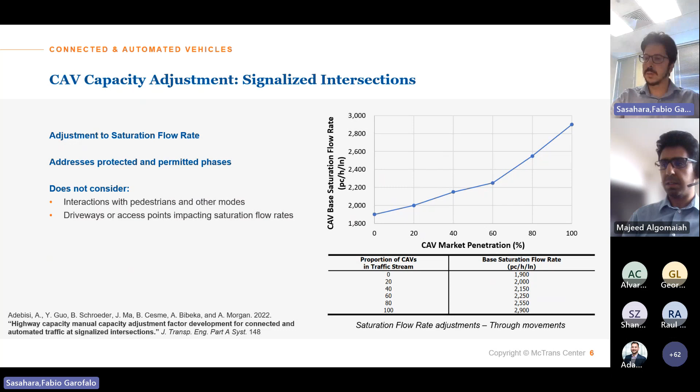Again, that's a planning level tool. It does not address everything. Interactions with pedestrians and other modes, and what's happening in driveways or access points, add a lot of complexity to the methods, not something that can also be addressed. So again, be aware of the limitations of the methods.

The last one on CAVs is roundabouts. The basic model of roundabouts analyzes capacity as a function of the circulating flow inside the roundabout. The effects of CAVs are plotted on graphs. There are 4 different capacity configurations depending on if you have 1 or 2 lanes entering or 1 or 2 lanes circulating inside.

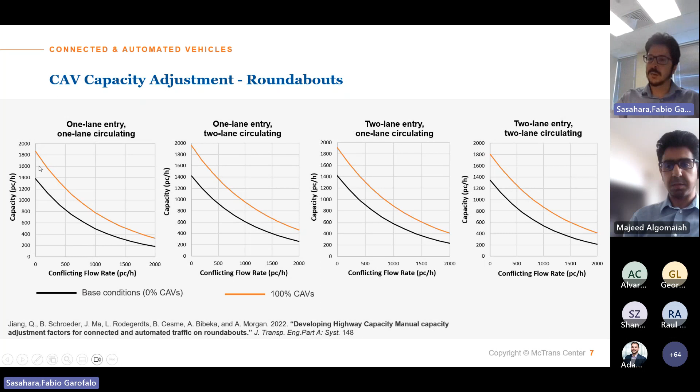The second method I want to discuss is two-lane highways, which completely replaces the methods we had before. We're going to compare a little bit what we had in the 6th and 7th editions. First of all, now we have the ability to do facility analysis as we currently do for freeways. We can model facilities with multiple segments that can be, as you can see here at the bottom, a passing zone when passing is allowed, a passing constraint when it's not allowed, and a passing lane when you add a second lane to the same direction of travel. We couldn't do that in the 6th edition.

Another new feature is that we can also break segments into sub-segments. Now this methodology is sensitive to horizontal alignment, so if you model horizontal curves, that gives you a better estimate of speeds.

In the second row in the column here, if you're familiar with the 6th edition, you may recognize this highway classification: class 1, 2, and 3. That depends on the class highway purpose. Class 1 is about intercity routes with longer distances and higher flows. Class 2 is more scenic routes, and class 3 is about rural locations with a mix of local and through traffic and a little bit of development. This classification was dropped in the 7th edition, so we don't have to worry about that anymore.

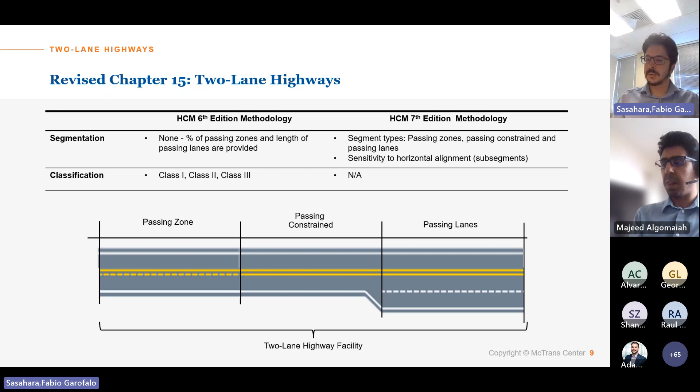Moving to the next slide and the table, we have some new performance measures. In the 6th edition, we had three measures: travel speed, percent time spent following, and percent of free flow speed. The last two were dropped.

We still have speed in the 7th edition, but now we have percent followers and follower density, two new measures. A follower is defined as any vehicle following the next one with a headway shorter than 2.5 seconds, which is the threshold where the HCM assumes a vehicle's speed is constrained by the next vehicle in a platoon.

No real change was made to capacity. Research didn't find any evidence that capacity should change, so it's still kept at 1700. The only addition in the 7th edition is that passing lanes now have a variable capacity, which depends on heavy vehicle percentages and grade.

At the bottom here, you can see a comparison of the level of service framework between the 6th and 7th editions. In the 6th edition, it depended on what class you were analyzing, so there were different service measures - travel speed, percent time spent following, percent of free flow speed, or a combination. Now we have a single service measure, follower density, that applies to every highway. Just be aware there are different criteria based on posted speed limit, more than 50 or less than 50 miles per hour.

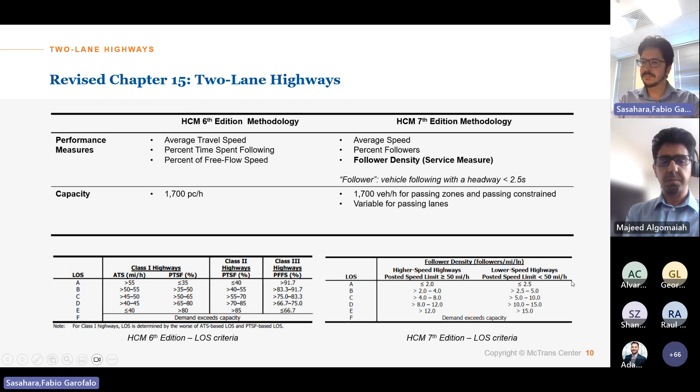The third method we'll be talking about here is some updates or upgrades to the pedestrian level of service. The main change here is on two-way stop control. All the other methods have just minor changes to the methodology.

Focusing on two-way stop control, we can again compare HCM6 and HCM7. In the previous release, level of service was based on pedestrian delay, measured in seconds per pedestrian. We had a small table addressing crosswalk treatments, which was expanded in the 7th edition - you can see a larger table here on the right side.

What has changed in the 7th edition? We have a new level of service measure called percent of dissatisfied pedestrians, which we'll see in a moment. The vehicular AADT is also now an input, so pedestrian level of service is sensitive to that as well. The list of crosswalk treatments is also expanded.

The idea of this table is that it lists a certain yield rate, or how compliant drivers are in yielding to pedestrians. In theory it should be 100%, but we know that's not what happens in the real world. So the HCM suggests average rates for different treatments like crosswalks, flashing beacons, HAWK signals, and others, as you can see in the table here.

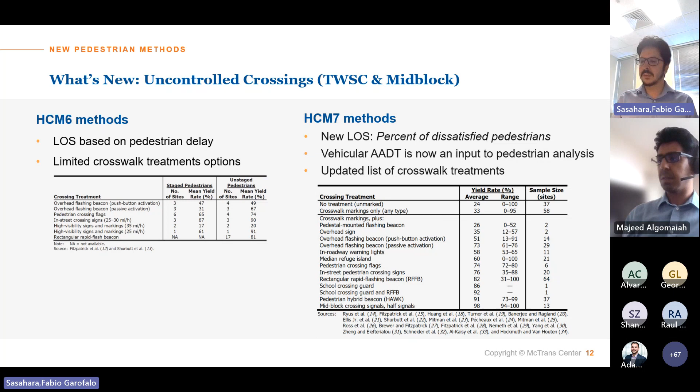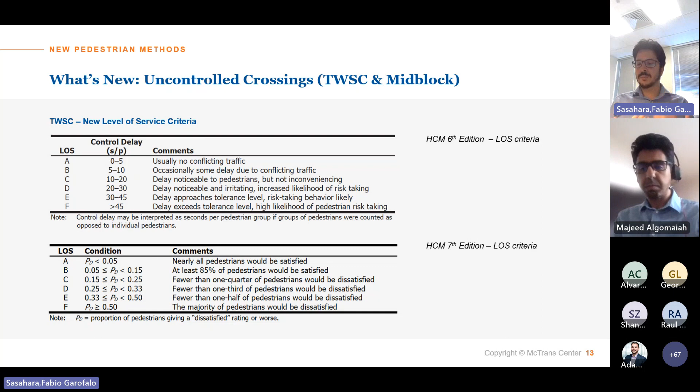This table compares the level of service criteria. In the 6th edition, as discussed, it's based only on pedestrian delay - anything higher than 45 seconds gives a level of service F. In the 7th edition, we're now talking about dissatisfied pedestrians. The threshold for level of service F is now more than 50%, based on a series of inputs including delay, but also others that reflect comfort and safety measures.

Finally, we have this new network method, developed as a whole new chapter, Chapter 38, adding new capabilities to the Highway Capacity Manual. The main idea is if you're analyzing a trip, say from point A to point B, how can you do that using the HCM? This trip, for example, goes through different facilities - urban streets, interchanges, a couple of freeway segments, and then streets again.

You would face a lot of limitations using the HCM6 methods. For example, what happens if you have a queue backing up or queue spillback between the freeway and the urban street? Or how can you convert everything to travel time? These are some of the limitations that this new method has overcome.

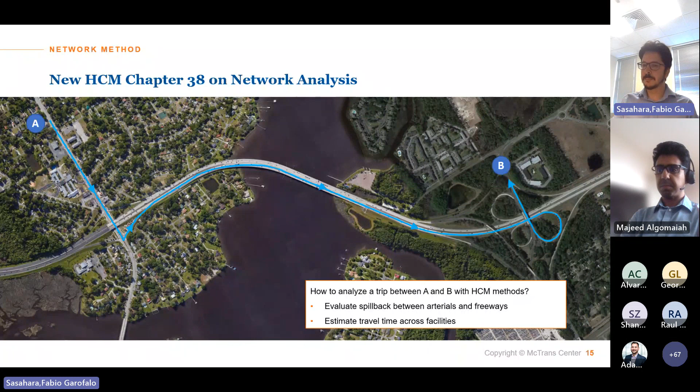Some of the new things we can do with this method: it converts everything to travel time automatically, so you have a travel time for the entire OD. This methodology is very OD oriented. We can analyze freeway street interactions or queue spillback, which is actually the bulk of this new methodology. But we can also address ramp travel time, which is something we didn't have before. And this methodology is also sensitive to freeway lane selection.

Now we can do an OD analysis. Different freeway lanes have different speeds, different flows, different capacities, so that can significantly affect the travel time through a certain set of freeway segments, depending on the OD, where the driver is entering the freeway and where the driver is leaving the freeway.

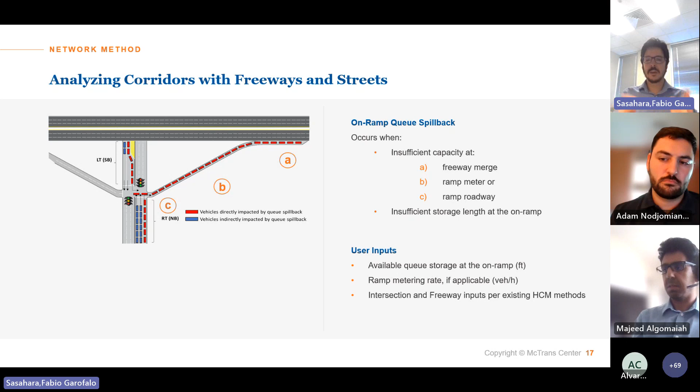So you have to measure the turn lane pocket. Same principle, we enter the length here, and the methodology will compute if the queue exceeds the available storage length or not. The same idea applies to off-ramps. And again, another new input is this queue spillback regime: should you expect the queue to go through one or two freeway lanes from the off-ramp, based on local conditions, especially geometry?

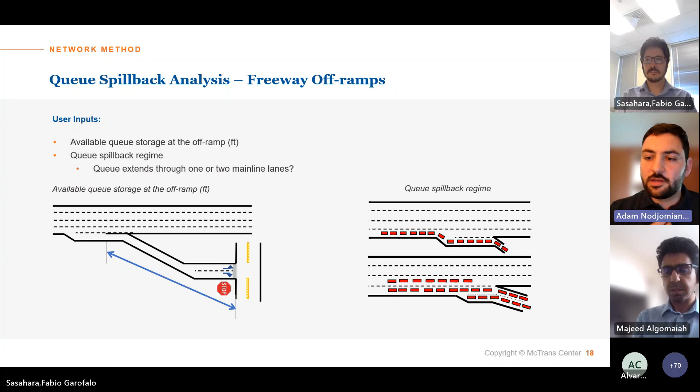One more question from the chat: Does the method of combining facilities in slide 16 yield an average travel time? Is there a metric of dispersion associated, such as standard error of the estimate or standard deviation? In other words, is there any guidance about reliability of the resulting travel time in the new HCM?

That's a good question. This methodology didn't really cover a lot about reliability, which is another chapter in HCM where we can analyze longer periods and measure different statistical measures of dispersion, median, different percentiles. One challenge of applying reliability to this methodology is that the HCM has structural differences in how reliability is computed for freeways and urban streets. For freeways, every single day of analysis is one scenario, whereas in urban streets, every 15-minute period is one scenario.

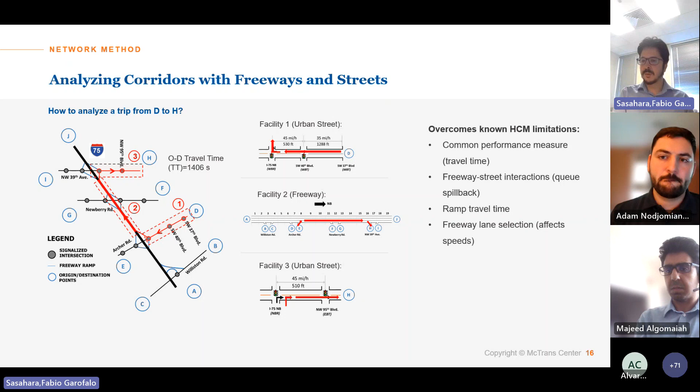So that creates a bit of a challenge, which wasn't discussed in this method. That's an opportunity for new research. It could be done with some adjustments, but not something that can be easily done right now. In short, my answer would be: it's designed for peak hour analysis, not for longer analysis, but it's something that could be done in the future with some adjustments. Still something to be researched.

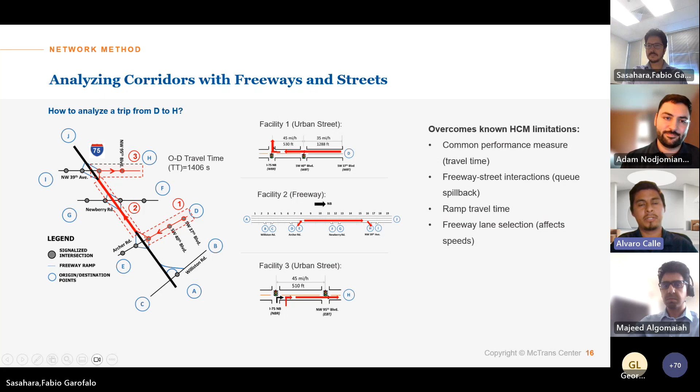We'll be moving on to our next presentation, titled Optimization, Modeling, and Assessment of Transportation Systems. I have the privilege of introducing my graduate school advisor, Dr. Hesham Rakha. Professor Rakha conducts regional research in multimodal large-scale transportation system optimization, modeling, and assessment. His innovative research reduces traffic congestion, reduces transportation energy consumption and greenhouse gas emissions, and enhances vehicle safety. His research includes modeling of human travel and driving behavior, optimization of longitudinal and lateral motion of various ground transportation modes, development of optimum network control strategies, and modeling the interdependencies of communication and transportation systems. Professor Rakha is a fellow of IEEE, ASCE, AAIA, and the Canadian Academy of Engineering.

The floor is yours, Dr. Rakha. Thank you very much, Alvaro, for the introduction, and nice to see you after, I guess, a couple of years. I don't know, when did you graduate? Was it 2016? It's been a while. 2016? Wow, time flies. Yeah.

Can you see my slides on the screen? Yes, yep, okay, you're good. How do I put it in? I guess, is it turn on speaker mode? It looks like it's fine now. If you're able to control your slides, then we can see it perfectly and hear you well.

Okay, so of course, this presentation that I'm presenting is the work of many people involved, students, researchers, and so forth. I'm going to go over a number of projects. How much time do I have, Alvaro? 20 minutes. Okay, so if you could give me a warning when there are 5 minutes remaining, I'll make sure that I finish on time. Definitely. Okay, thank you. So what I'm going to go over is a couple of projects that we've worked on that tie into this theme of optimization, modeling, and assessment of transportation systems.

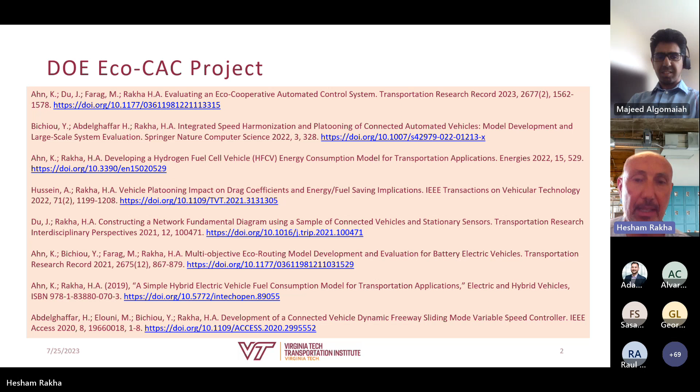The first project I'll be covering is one we did for the DOE, the Department of Energy, ARPA-E, specifically the DEER program. It involved developing a controller with an upper level, which we called the Eco Cooperative Automated Control System. At the upper level, we have a router that routes vehicles in some optimum way, with the objective of minimizing energy and fuel consumption. We also have a strategic speed controller that identifies congestion in certain regions of a city and controls the speed of vehicles entering those regions, thereby controlling the flow in order to disperse that congestion.

There are also two lower level controllers. One optimizes the vehicle speeds. I'm not sure if you can see my mouse here—can you see it? Let's see. Yes, okay. So at one level, the Eco-CACC-I, it optimizes the trajectories of vehicles in the vicinity of signalized intersections. In the Eco-CACC-U, it's looking at uncontrolled roadways, so freeways, where we're trying to optimize vehicle trajectories by platooning vehicles and driving them in fuel-efficient ways on freeways.

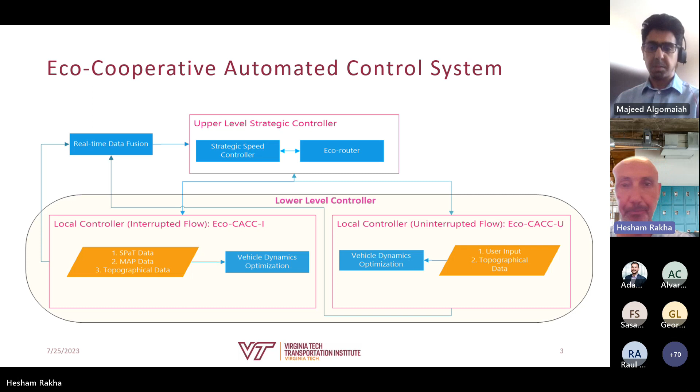With regards to our router, basically we developed this unique router where whenever a vehicle traverses a roadway segment, similar to what Google does. So if you are using Google Maps, whenever you traverse a segment, you provide information to Google that they can use for other vehicles who are planning to use that same route in the future.

But rather than just sending one piece of information, which is the travel time, we send 8 pieces of information, 8 variables. Those 8 variables allow us to compute the energy consumption of any vehicle. So basically, those 8 variables are fused with data that we receive from other vehicles, similar to what Google Maps does, and then we send it back to the vehicle.

The vehicle can then, based on its powertrain—so if I'm driving an electric car, using those 8 variables and the parameters of my car, I'm going to come up with the optimum route for an electric vehicle. If I'm driving a gasoline vehicle, I'm going to come up with a totally different route, which is the optimum route for a gasoline vehicle. So using this vehicle agnostic approach, we are able to develop vehicle-specific optimum routings that will minimize, in this case, the vehicle energy consumption.

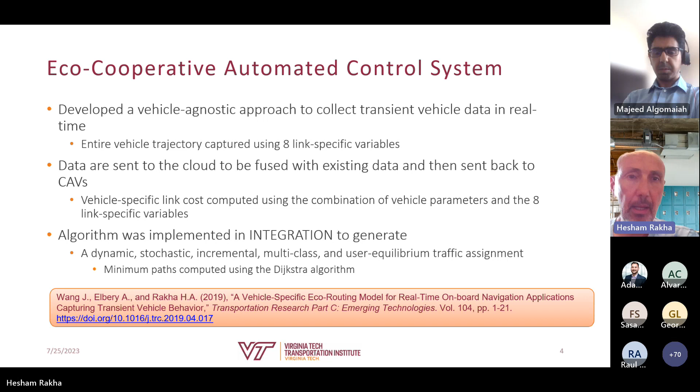One of the things that we did find when we did this work was that if you're trying to minimize the energy consumption of electric vehicles, it is extremely conflicting with the objective of minimizing the travel times. The reason for that is electric vehicles are more efficient at lower speeds. Their optimum speed is around 15 miles an hour.

And they're more optimum in stop and go conditions, because when you're braking your electric vehicle, you regenerate energy that gets sent back from the wheel back to the battery, and you recharge your battery. So stop and go conditions are actually better for electric vehicles in terms of energy consumption than high speed driving.

So then the next step we did is we looked at where you could try and come up with some combination of minimizing your travel time, but at the same time minimizing your energy, in order to come up with ways that would minimize your energy but have as minimum impact on increasing your travel times.

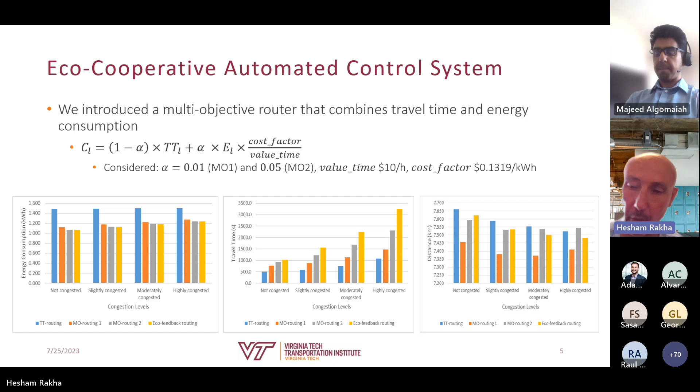Now, this also happens with gasoline vehicles, but it's much less pronounced, because the optimum speed of a gasoline vehicle is around 55 miles an hour. So it's better on a freeway, but if you go traveling at 70 miles an hour, then you get less efficient in your fuel consumption, but you'll be more efficient in your travel time. So we were looking at those kind of multi-objective routings.

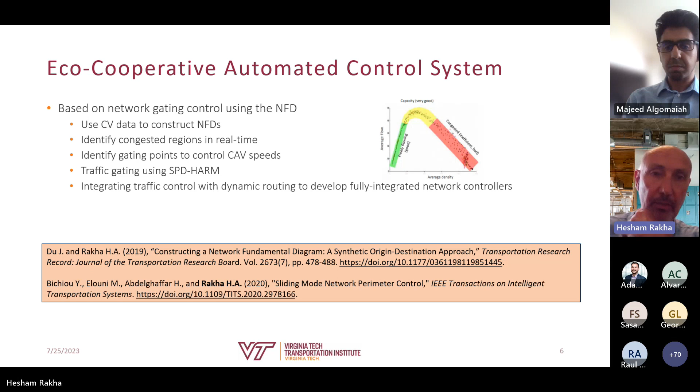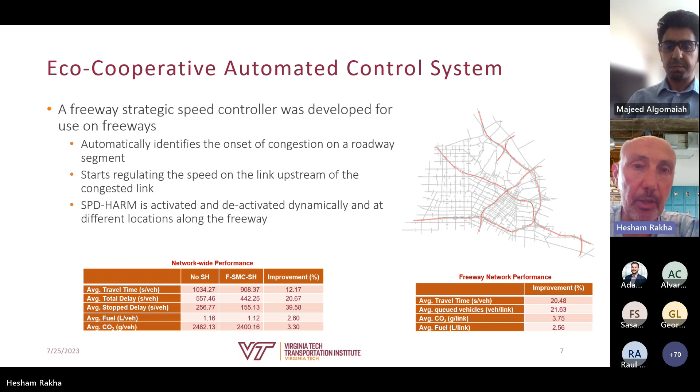These papers describe the approach that we developed. We also developed some platooning algorithms that we tested. This is the downtown Los Angeles network. The red segments here are the freeways, where we implemented our speed harmonization and our platooning, and we showed benefits of that. I'm going to skip these, given that we don't have too much time.

They're approaching a traffic signal that is red. They come to a complete stop, and then when it turns green, they accelerate.

Now, if we had connected vehicles, we could assume that through this connectivity, the traffic signal controller could share with the vehicles the SPAT, which is signal phasing and timing information.

Using the SPAT information, we can try to optimize the vehicle trajectories. Let's say the SPAT information tells me that the traffic signal is red, but it's going to be changing to green in 15 seconds in the future. My objective is to delay this vehicle by 15 seconds so that when it arrives at the traffic signal, it turns green, but in a fuel efficient way.

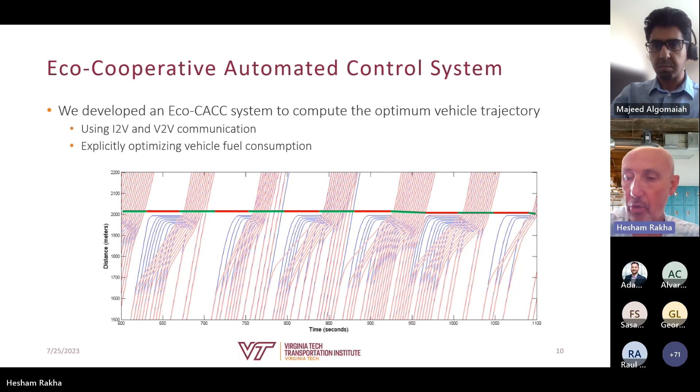In a fuel efficient way, typically that means I'm trying to have its speed as high as possible when that traffic signal turns green, so that I minimize the amount of acceleration the vehicle needs to do downstream of the traffic signal. So we've developed some algorithms, which we call EcoCACC, or in the literature they also call it GLOSA, but whatever you want to call it, it's basically optimizing the vehicle trajectories in order to minimize their fuel consumption.

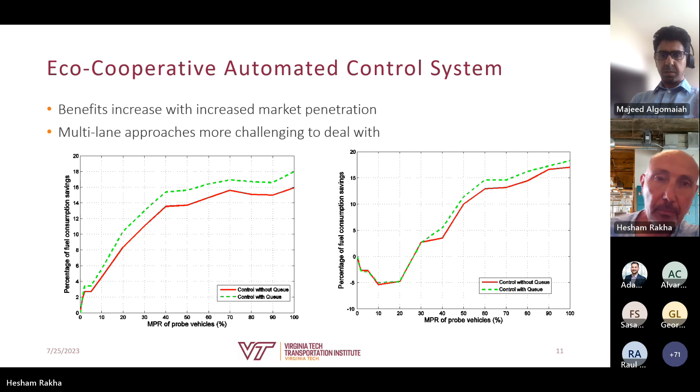We also implemented this in a real car. We ran test subjects, 32 of them. The first scenario was an uninformed scenario: you're just driving your car, approaching a traffic light that can be red or green, and we just look at your behavior.

Scenario 2, we provide on the screen a countdown indicator. So you have some connectivity to the traffic signal controller, but we're just displaying a countdown to the driver, telling them the traffic signal will turn green in 15 seconds, then 14, 13, and so forth. And we look at how the driver behaves.

In scenario 3, we have a connected vehicle without automation. The vehicle receives SPAT information, and our algorithm running on the vehicle computes the optimum speed at that instant. We display this to the driver, but rather than a visual display, we use an auditory one, because we found the visual display was very distracting to the driver. Every 2 seconds we would update: it would tell you, for example, you should be driving at 35 miles an hour, then the next 2 seconds, 30 miles an hour, and so forth.

Then in scenario 4, we have a connected automated vehicle where not only are we receiving the SPAT information, but we're also controlling the longitudinal movement of that vehicle from 250 meters upstream of the traffic signal to 180 meters downstream of the traffic signal.

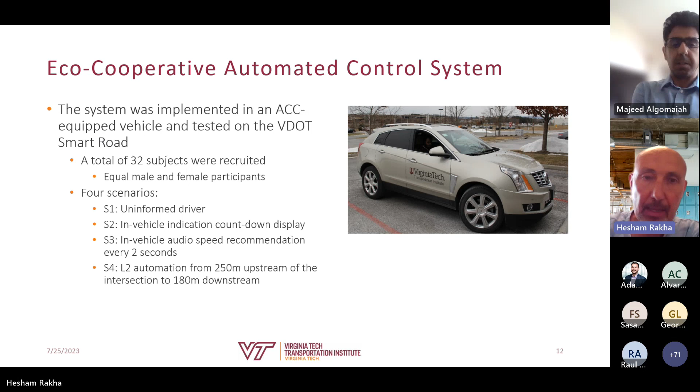What we found in this study is that we could get on average a 39% reduction in fuel consumption for gasoline vehicles, and a 9% reduction in delay. Although delay was not our objective, we actually did manage to achieve savings in delay. If you just had a connected vehicle without automation, the savings in fuel consumption were reduced from 39% to 13%, relative to the base case uninformed driving scenario.

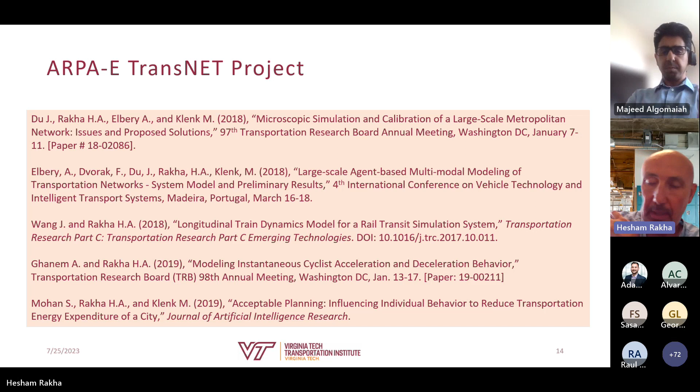So the next one I'm going to talk about is a project we had called TransNET that we did for ARPA-E. Basically, this project required us to select an area with more than 3 million travelers. The objective was to target 10% of the population of those travelers and come up with more energy efficient travel recommendations, and see what the benefits of those recommendations would be at the system level.

We worked with the Palo Alto Research Center. They had an app called GoLA that would compute an optimum route from point A to point B that is multimodal. For example, it could tell you to ride an Uber from your home to a subway station, take the subway, get off at another station, take a ride share from there, drop off, and then walk the remainder of your trip. You would pay once, and a portion of that payment would go to the subway system, a portion to Uber, and so forth.

Given that we couldn't test this in reality, we used our integration microscopic simulation software to run a simulation of the greater Los Angeles area. This 2.5 year study can be summarized in one sentence: if we targeted 10% of the population with information, 55% of those 10% accepted our recommendation. So we were controlling in total 5.5% of the total population. By doing that, we got a 4% reduction in energy and fuel consumption, and a 20% reduction in total delay.

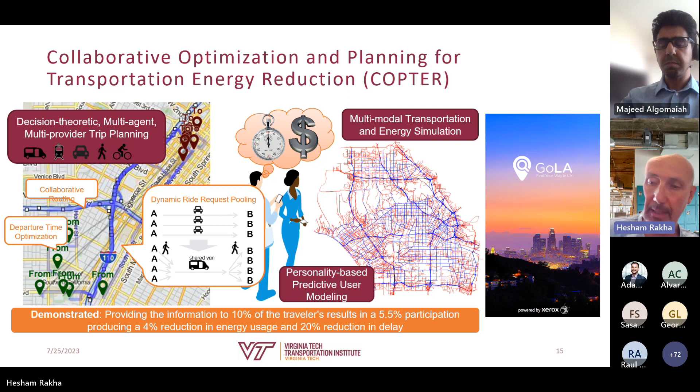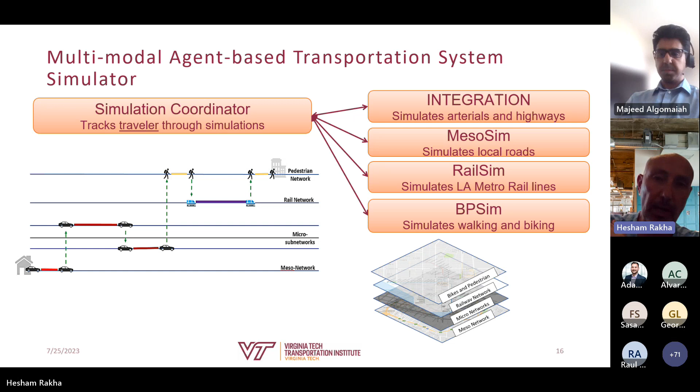Of course, to do this, we had to develop different modeling tools around the integration software. We had a simulation coordinator that would track the traveler across different modes of transportation. We developed modeling of the rail system, the bikes, and pedestrians, and also a mesoscopic simulation to model the local streets. Our intention was to get this to run in real time, and we were able to do so, running these 3+ million travelers at real time and microscopic level, tracking every person individually.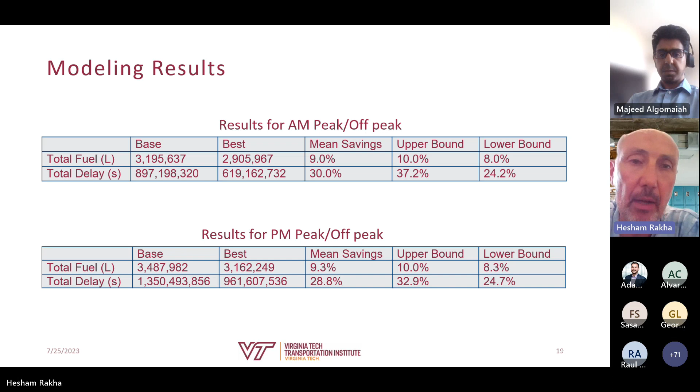One of the things we looked at was what would be the upper bounds of these savings, and this we observed in COVID when we had the lockdowns. We said, if we could tell 10% of the people to just work from home, what would the benefits be? We found a 9% reduction in energy consumption for the AM and PM peaks, and a 30% reduction in delays in the greater Los Angeles area.

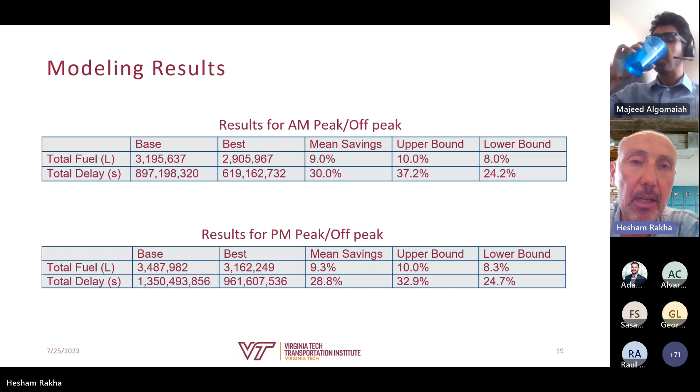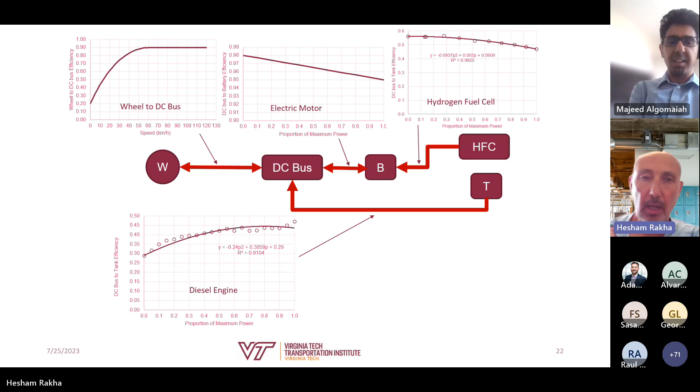Another project we're just finishing, for ARPA-E, is looking at the decarbonization of the rail freight system in the US. I'm going to jump to the final slide, but I'm not sure if you can see the numbers here. Basically, we developed a simulation tool called NetTrainSim that models the freight system. We modeled the entire US freight system and then computed results, and did some validation.

So for our simulations, we got close to 3 billion gallons of diesel fuel consumed per year, which is consistent with what is reported in the literature. We showed that by switching to hydrogen fuel cell, we could save around 16% in the energy consumption.

By making these trains diesel/hybrid, electric hybrid, we could get a saving of around 6%. That's making sure that the state of charge at the end of our trips are within 1% of the state of charge at the beginning of the trips.

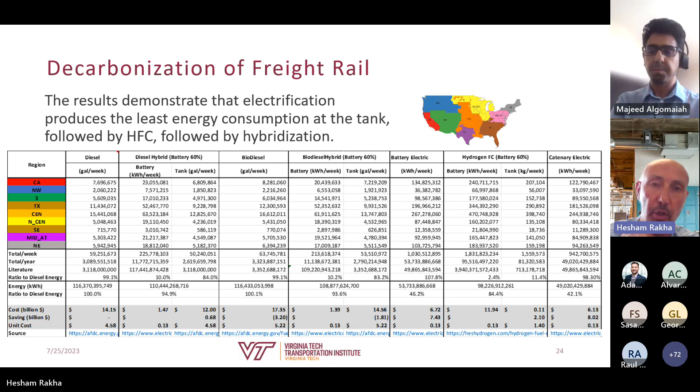I think I'll end it here and then open the floor to any questions, if there are any questions.

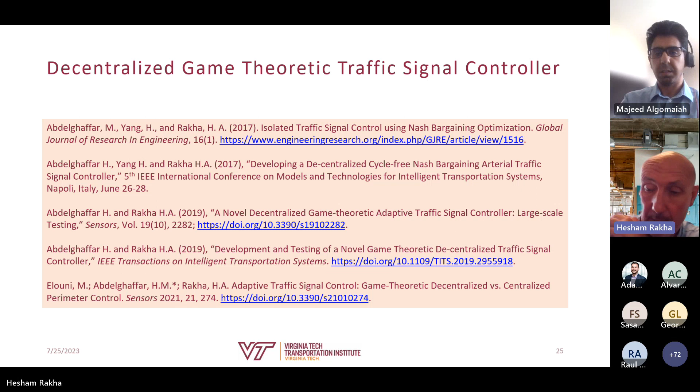We were running it at the speed of real time on a server, and I don't know exactly the power of that server, but what we did, maybe I'll go back here to my slides here, in order to achieve this speed that we wanted to.

The red links are mesoscopic, so basically when you enter a link, based on the density of traffic on the link, we predict when you're going to be arriving at the end of the link, and then once that time reaches where you're allowed to leave the link, we just check whether the traffic signal is red or green. If it's red, we still hold you in a queue, and if it's green, we allow you to proceed through.

Also, in order to speed it up, we divided the network into 5 subnetworks, and we ran each subnetwork on one CPU. So basically these were running on 5 CPUs. We had a simulation coordinator that would make sure that every second we resync all these subnetworks, and then we move on to the next second and so forth. But we finally managed to get this to run in real time, at real time speed, I guess.

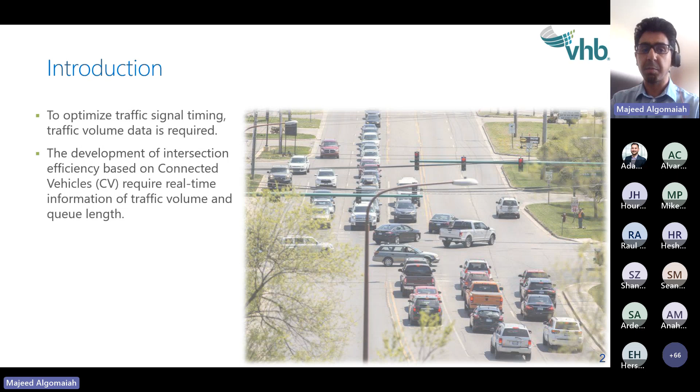So in this research, we are trying to tackle a problem. We all know that in order to optimize traffic signal timing, we do need traffic volume data. And also in the future, to improve connected vehicle applications, we also require real-time information of traffic volume and queue length data. Right now, the existing methods for traffic volume data collection are either the manual method, basically traffic counting by hand or by devices, or using something automated, more like video cameras and other automated ways.

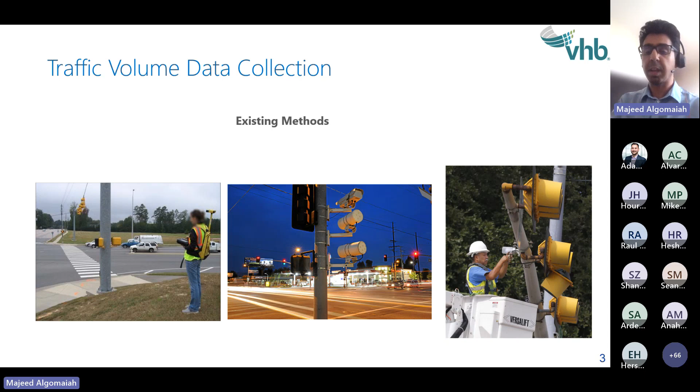However, the problem is that those automated methods are more expensive to install and also to maintain. So that's why now the new technology in this area is to use trajectory data.

For those who are not familiar with the area, what do we mean by trajectory data? It's simply the time and location in terms of GPS points and time of the data. How can we present it? We simply present it in the time and space diagram, which is the fundamental diagram, and the intervals of the trajectory data are every 0.1 second or 3 seconds, depending on the source of the data.

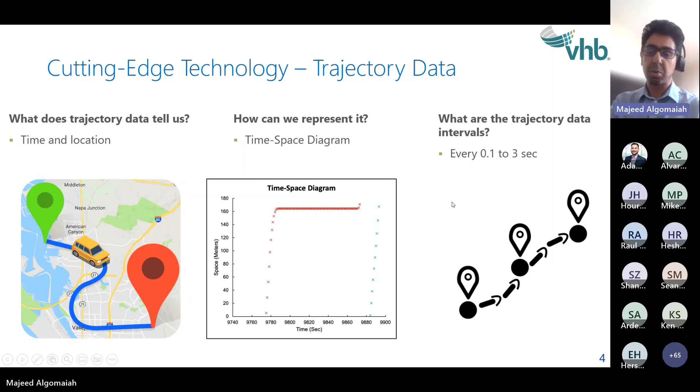So what is available here as a source? We have probe vehicles, which is our floating cars, and there are many vendors that use or sell this kind of data. The most recent one is using connected vehicle data, which is the most recent way of using trajectory data, from different vendors and directly from some sources.

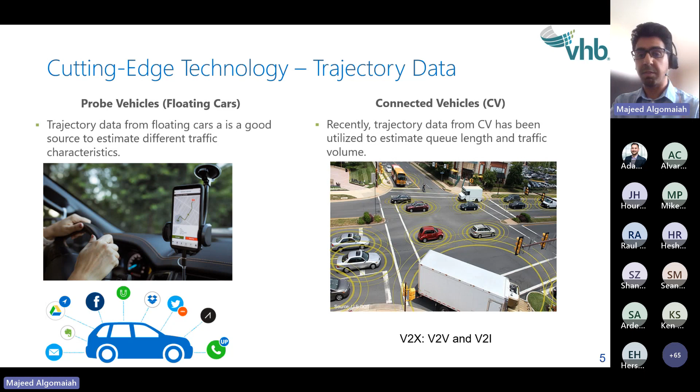So with this kind of data, we can simply estimate the traffic volumes. In practice, there is a big company called Streetlight Data. I'm sure some of you are familiar with it, and also at VHB we introduced Intersect, which is the same thing, using trajectory data to estimate traffic volume.

So what is the challenge in this area? Actually, one of the biggest challenges is the low market penetration rate. What do we mean by market penetration rate? For those who are not familiar, it's the number of vehicles that represent the data. For example, in a traffic flow like this one here, probably there are only 2 vehicles that are connected vehicles, or vehicles that we have trajectory data for.

Right now, connected vehicles are expected to have 5 to 15% of the traffic flow by 2024. By 2027, probably it will reach 17%, which is something we are not very sure about.

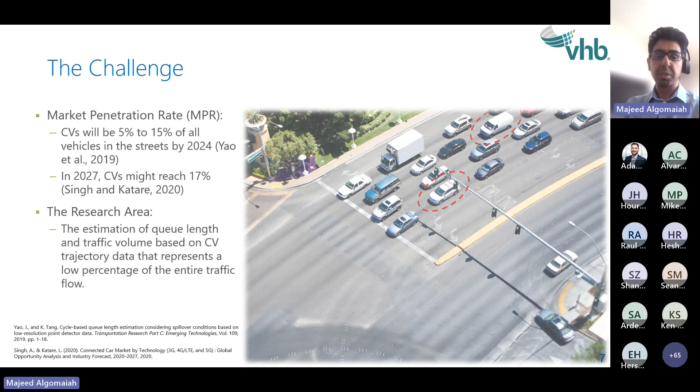So what is the research area? Our research area is simply the estimation of queue length and traffic volume based on connected vehicle trajectory data, which represents only a low percentage of the entire traffic flow.

So here, the research gap we are trying to tackle is that the previous models lack independency, as they require more input parameters from the intersection, and also they require a higher market penetration rate. Also, all previous models don't consider all the vehicle classifications.

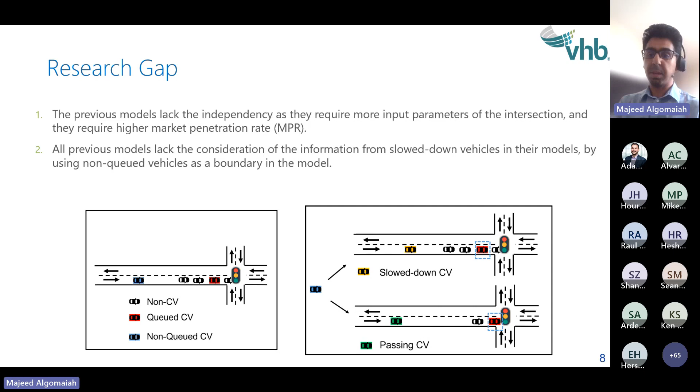In other words, if you see here, my mouse is to the left - there are 2 types of vehicle classifications: queued vehicles and non-queued vehicles. In our research, we rather introduce something called slowed down vehicles. We believe that the slowed down vehicles carry so much information that we can use in the model to estimate the traffic volume data.

So what is the objective of our research? It is to establish a relationship between the slowed down vehicles and the last queued vehicle, and then utilize only prior data sets and deep learning techniques to identify the last queued vehicle. Therefore, if we estimate the last queued vehicle, we can know the queue length, and from the queue length, we can also know the traffic volume, which is the most important thing.

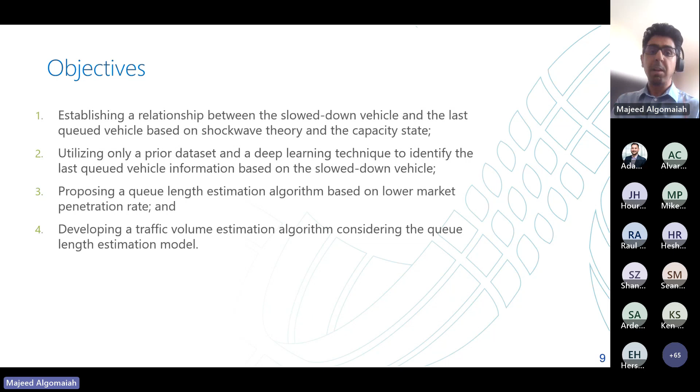So here is the methodology that we use. Simply, we had to first use a prior data set from that intersection. Then we applied deep learning models, and here we relied on the shockwave theory to find two different models: one called the speed distribution model, and the other called the stop bar speed model. By getting those two models, we can use the real-time data from that intersection to put into the model, so we can get the queue length and finally the traffic volume.

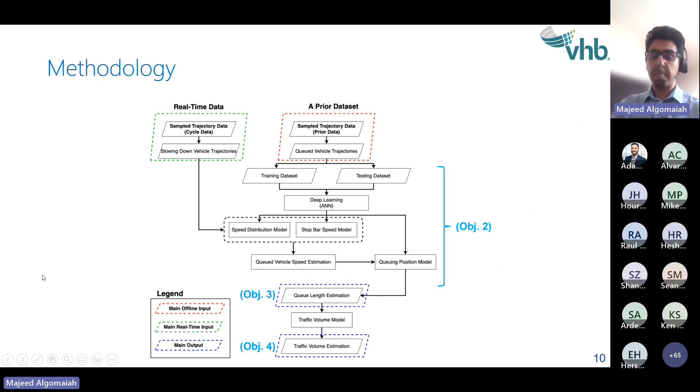So let me just recap this time-space diagram here. As you can see here in red, this is a vehicle that actually made a stop at the traffic signal, while this one in green didn't stop at all. Here is the shockwave profile. When many cars started to stop, this shockwave got created, and then after that it gets dissipated. So this is the dissipation shockwave in green, and the red is the forming shockwave.

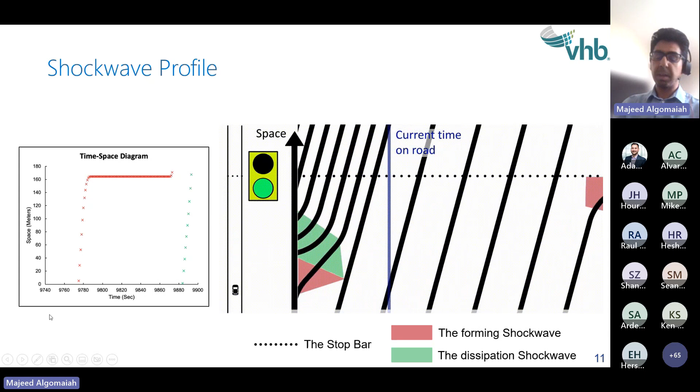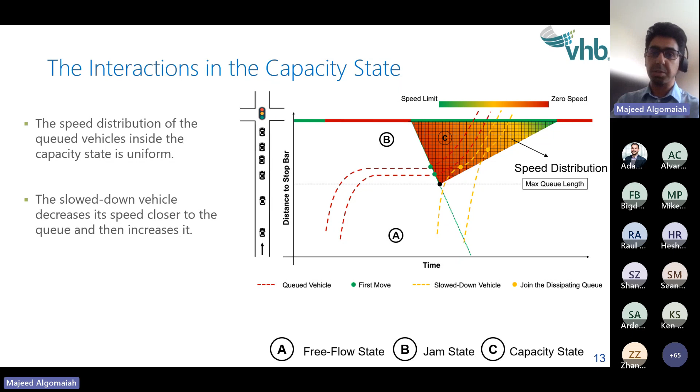Let's talk about the interaction between vehicles. Here, C is the capacity state, when vehicles start to move after receiving the green light. In yellow are the slowed down vehicles, which have to slow down and join the queue, then speed up. This area is called the speed distribution, and it's one of the biggest models we used to estimate traffic volume. We believe this information about those vehicles is very important, as they interact with the queued vehicle in the capacity state, making it easier to come up with a better traffic volume estimation model.

In terms of experiment, we did two simulation experiments for estimating the queue length and traffic volume, using VISSIM as a simulation model. The power of simulation is that it's hard to get certain data for big research because there are many variables to test with limited data. In a micro simulation environment like VISSIM, we can get as much data as we want to test.

There is also an important factor, the resolution of the trajectory data. We can get up to 0.1 second, which is helpful for testing our model. We only used 10% of the vehicles as sampled data, since we know we cannot get 100% in reality. We got the data from 7 a.m. to 7 p.m., with 2 peaks and so on. We ran the analysis on the data.

So we ran the model using 30 cycles of the day. As you can see here, in solid black, this is the traffic volume or ground truth that we had, and the dashed line is our estimation model showing how it performed. Also here, this is the queue length in the cycle itself. The bottom line is we found good accuracy of 88% with a low market penetration rate.

The minimum accuracy was 72%, with a MAPE of 27, which is the mean absolute percentage error. The maximum accuracy in some cycles was 99%. Previous models could achieve an accuracy around 88% only with very high market penetration rates, like 20%.

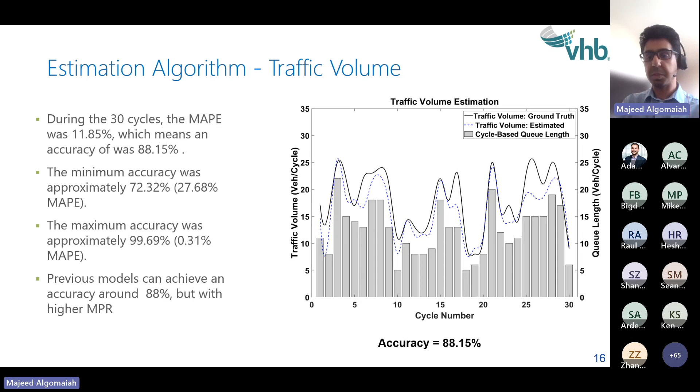We also tested the effect of market penetration rate, starting with 5% up to 20%. We could see a big difference between 5 and 10 - when we moved from 5 to 10, we got improvement in accuracy. But from 10 to 20, the difference wasn't as huge, though there was still some improvement. The accuracy at 20% was about 92%, while at 10% it was 88%.

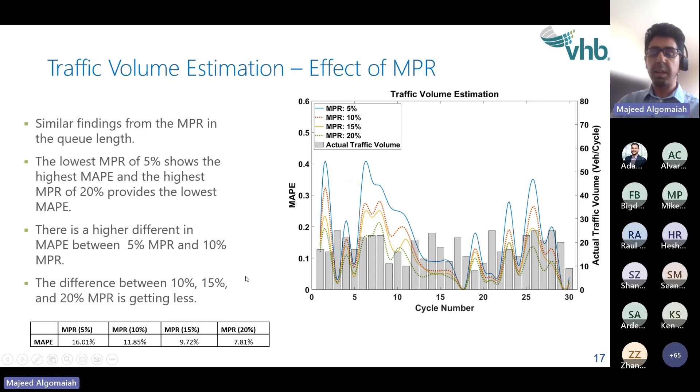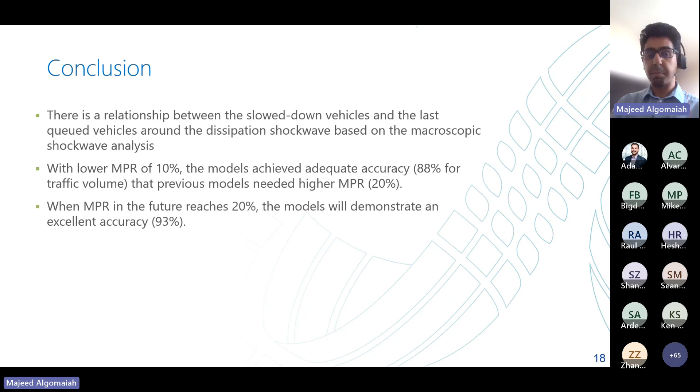Our conclusion is that there is a relationship between the slowed down vehicles and the last queued vehicles when looking at it from a dissipation shockwave point of view, using shockwave analysis. With a lower market penetration rate, our model achieved good accuracy of 88%. In the future, if we get a better market penetration rate of 20%, we expect to get 93% accuracy. This is the end of my presentation - if you have any questions, please feel free to ask.

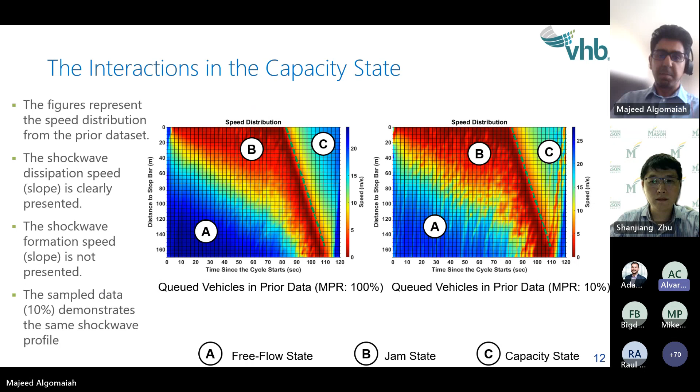Yeah, that's actually a good question. It's very hard to get an answer about the market penetration rate, because there are many different car companies and many different sources of data. In this case, this is based on connected vehicles that are able to communicate, which is right now in the market. I cited the study I got the number from, but answering your question, it is based on connected vehicles that have the ability to communicate with infrastructure.

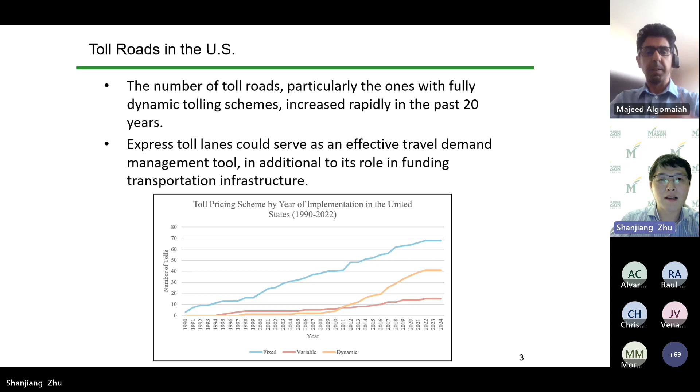To evaluate those facilities and the toll policies, value of time is a key parameter, as we all know. So we are going to look at this problem using locally collected data. We are also trying to inform the debate between Lexus lanes versus option lanes. Some people believe express toll lanes only benefit people with higher income, while others believe the user base is broader. We are going to look at that problem here using locally collected data.

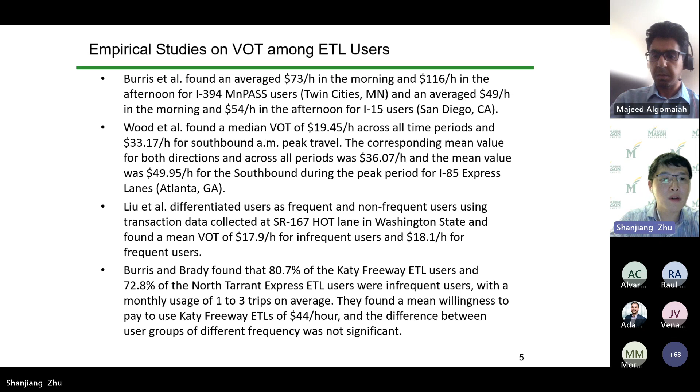Only two studies look at frequent versus non-frequent users. One concludes non-frequent users have higher value of time, the other says there's no significant difference. So that makes us feel there is a need to really look at this problem using locally collected data.

The objective for this study is to look at ETL usage by vehicle, by occupancy, by frequent versus non-frequent users, and by different time of day. We also want to empirically estimate the value of time using locally collected data, based on the I-66 Inside the Beltway corridor between March 2018 to May 2018. It includes 64 weekdays during which the tolls were collected, and we also have the INRIX data to inform the travel time along the corridor.

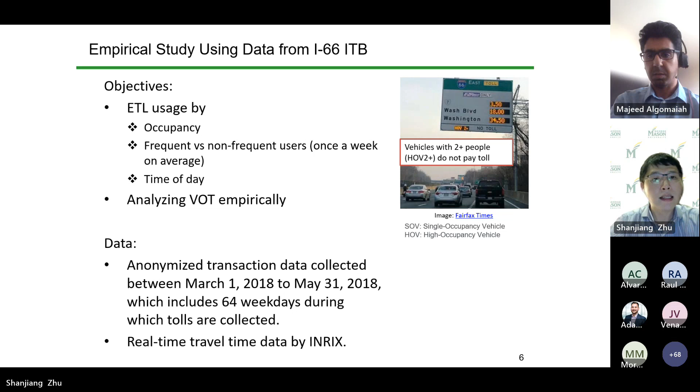There are many combinations of entrance and exits along the corridor, and in order to avoid certain confounding factors, we decide to use the longest possible routes, so people going from the interchange with I-495 all the way to the DC line. We also look at the trip type, high occupancy vehicle trips versus single occupancy vehicle trips. SOV pays tolls and HOV do not.

We also look at entry and exit timestamps, which allow us to compare with INRIX data, so we can look at the travel time along alternative corridors. We know exactly how much toll was paid, and we also have an anonymized identifier, which we can use to track trips across the entire 3 months time period.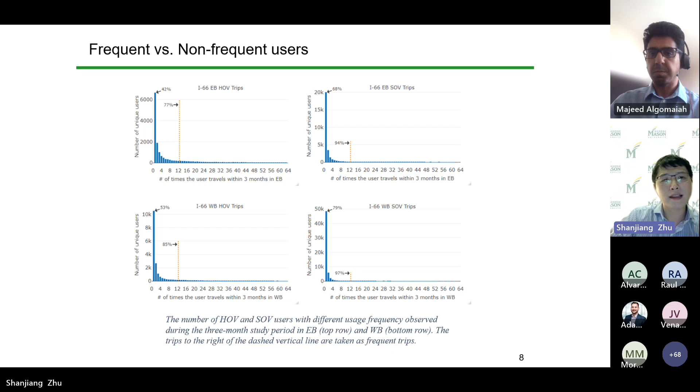Next, we want to look at the time of day distribution. On the upper level you have eastbound results, and on the lower half westbound results. The blue line represents the time of day distribution for frequent users, and the red line represents the distribution for non-frequent users. On the left you have HOV users who don't pay tolls, so the departure time pattern here is closer to the real preference for departure time.

If you look at the departure time for single occupancy vehicles who have to pay the toll, they are skewed leftwards, meaning many of them departed much earlier than what they would otherwise prefer. But for the non-frequent users, the shift is not that straightforward, not very obvious. If you look at the afternoon peak period, you also observe a slight shift to the early hours when people pay lower tolls, but the shift is not as strong as in the morning peak period. So those are some quick observations of the data.

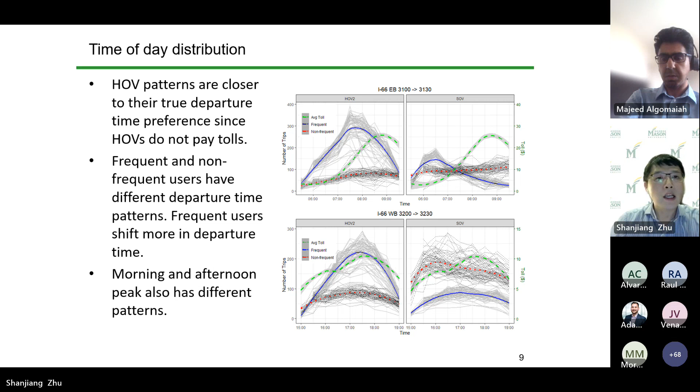There are certain groups of users who really don't care about the high tolls, or they have a trip of higher value they must complete. This implies frequent users are more sensitive to tolls, and they try to avoid paying higher tolls by switching departure time, switching to carpooling, or taking other modes.

So next we want to do this numerically. First we compute the time savings they achieve using the I-66 corridor, comparing travel time along the corridor with users who traveled along US 29 and US 50 using INRIX data. We use real travel time, not instantaneous travel time, tracking segment by segment how much time they spend and when they arrive at the next segment, adding travel time as they progress along the corridor. We compute the difference in travel time, the travel time savings, and divide the tolls by the travel time savings. That's how we define value of time in this case.

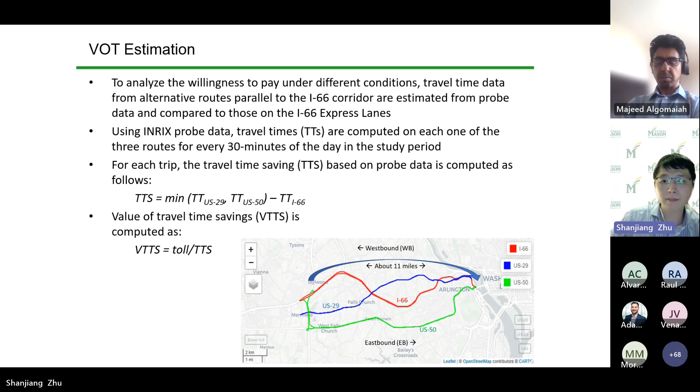We first present the results for the morning peak. On your left you have frequent users, on your right non-frequent users. As expected, non-frequent users pay much higher tolls—on average $62 per hour for the time they saved, while frequent users pay on average $45 per hour. The white areas show the distribution, and you can see two peaks, which we don't have a good explanation for, but the empirical data show two peaks for both frequent and non-frequent users.

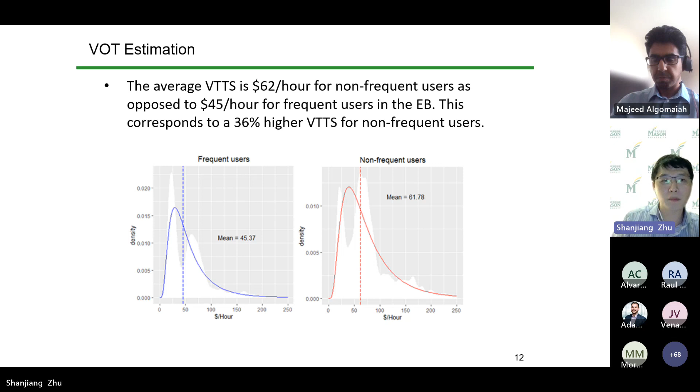On average, non-frequent users pay 36% higher for the same time savings. For the afternoon peak, those two peaks disappear—we see a single peak, and the patterns for frequent and non-frequent users look quite similar, paying around $38 per hour for the time saved.

So this is the value of time we estimated for users who travel along the corridor, but we also have users who travel on parallel arterial streets. To estimate the value of time distribution for all users along the corridor, we adopt a weighted average approach, looking at the number of trips crossing the lines we draw—some use I-66 inside the Beltway corridor, some use US 50 and US 29. On average we have $30.5 per hour value of time for the AM peak, and the number is lower for the afternoon peak.

For people who didn't pay the toll, we used the MWCOG planning model value of time assumption, which is $24 for the morning peak and $20 per hour for the afternoon peak. But once we estimated this, we may ask: will the value of time change over time, and how do we know if it has changed? If we have to go through the exercise again and again, it takes a lot of time, so we wanted to develop a quick diagnosis method to see if the value of time has changed.

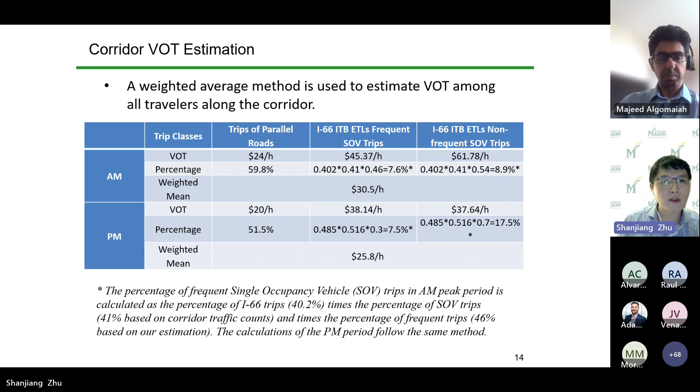So how do we do that? Through the modeling process, we found the overall travel demand and the value of time distribution are the two most important factors affecting usage of the express toll lanes, and their impact would be different.

If demand increased across the board, that would increase usage of both the shoulder hours and peak hours of the express toll lanes, and also increase demand for the general purpose lanes. But if it's not overall demand change, and only the value of time has changed, then we'd expect different signs for the peak hours and shoulder hours, and different signs in demand change for the peak hours versus general purpose lane usage—since express toll lanes pull users from shoulder hours and from the general purpose lanes.

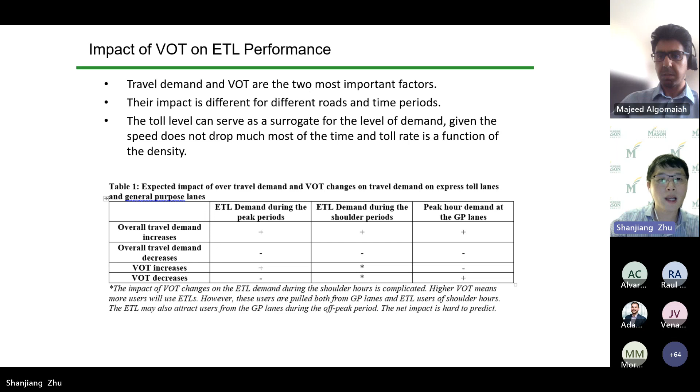So how do we evaluate the demand change over time? We know the number of users is proprietary for many P3 projects, so we cannot know that directly. But since most express toll lanes are not congested, demand is approximately proportional to density, and density is the single most important factor driving toll price. So we can use toll price as a surrogate measure to look at demand change—if demand increases, the toll level increases. The COVID-19 pandemic provided a natural experiment to test this assumption, so here we compare the demand between 2019 and 2020 along I-66 inside the Beltway corridor.

Even in 2022, it's still lower than what you saw in 2019 along I-66. Here, for the morning peak, we have a confounding factor because the capacity has been changed. We added one more lane for the eastbound corridor. So keep that in mind.

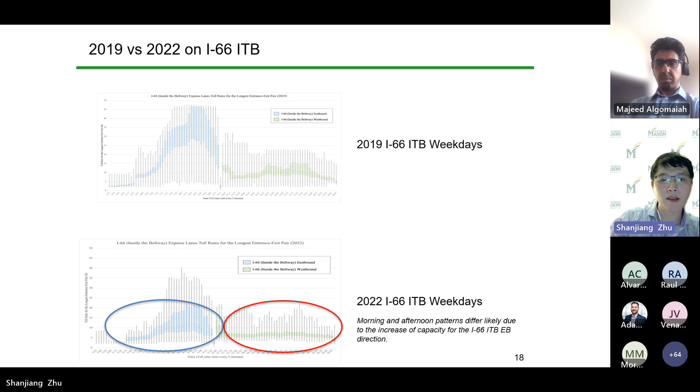The shaded area represents the highest drop. So for the morning peak, the highest drop happened in 2021, and for the afternoon peak, the highest drop, actually the lowest toll level, appeared in 2020.

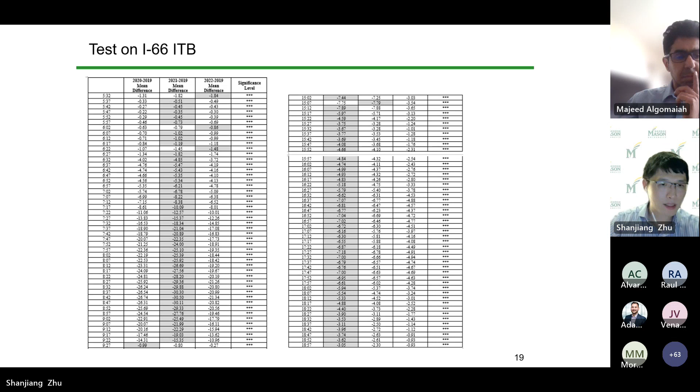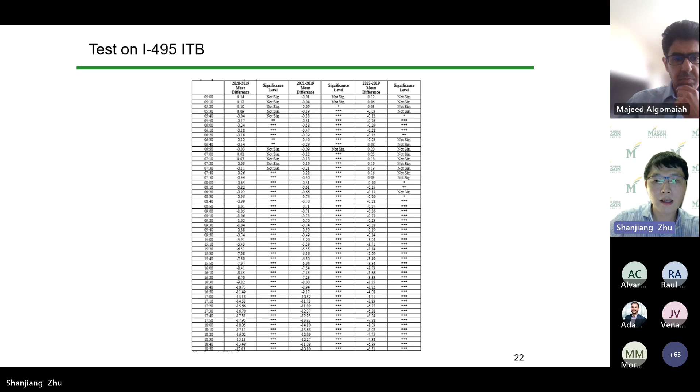So in terms of the conclusion, using the empirical data, this study shows that most ETL users are non-frequent users and only use them for trips of higher value. Frequent and non-frequent users exhibit different departure time patterns using HOV departure time as a reference. And frequent and non-frequent users show very different levels of value of time, with non-frequent users less sensitive to high tolls, so you see a long tail in their value of time distribution.

VOT has a huge impact on the performance of ETLs, and it's possible to evaluate potential change statistically under certain assumptions. So we just demonstrated that using the data from I-66 and I-495.

Okay, with that, I will open the floor for questions. Great, thank you very much. That was very, very informative.

Got two questions in the chat. The first is on I-66 PM. Why did non-frequent users pay less than frequent users?

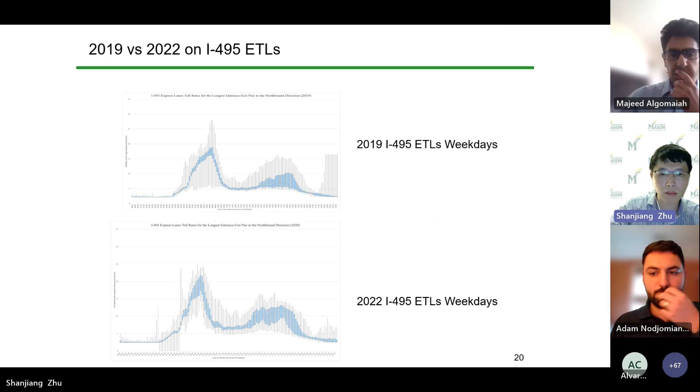I believe non-frequent users still pay more, but they are not statistically significant. So, I mean, frequent users here number is slightly higher for mean, but non-frequent users has a long tail, but statistically they are not very different, only $1 apart or less than $1 apart.

The next question is, did you consider the difference between business trips and personal trips?

We suspect the reason we have trips of really high value of time is because some of them are business trips, but with the data we have, there's no way for us to differentiate different vehicle types. We have no information about the demographics, etc. We only have an anonymized identifier, which allows us to track the vehicles, but not the people, the drivers.

Great. Yeah, thank you. Thank you very much. Oliver, I can pass it back to you to close us out unless there's any other comments. You're muted. Sorry, is on mute there.